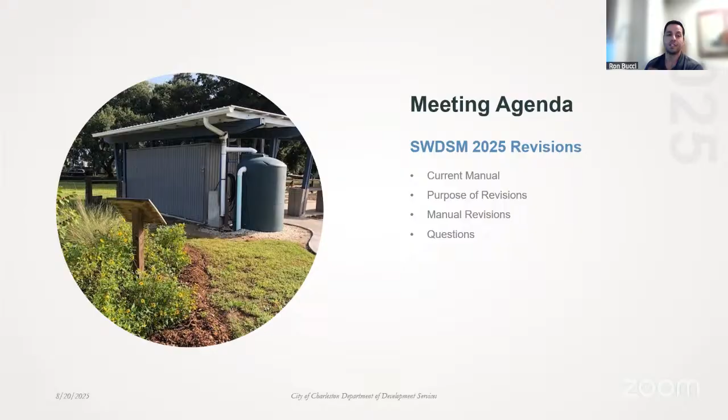Okay, great. So just a quick agenda: I'm going to go over where we sit with the current manual and then touch on the purpose of the revisions, why we are making revisions after 5 years of implementing the 2020 manual. Then I'll go over the details of the manual revisions with you all and open it up for any questions you may have.

So with the current manual, it was implemented in July 2020. It put a heavy emphasis on reductions in discharge rates and volumes, especially for those areas that we know flood within the city, of which there are several. It stressed the importance of accounting for potential sea level rise, making sure our city is more resilient to handle that. We have additional requirements specific to publicly dedicated systems that we would have to take over and maintain. An important aspect, in my opinion, is to prevent any adverse impacts to downstream and adjacent properties for any development or even city project.

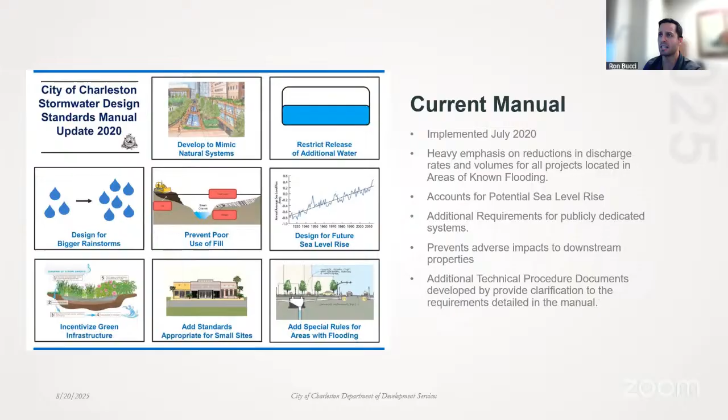And then we had a bunch of additional technical procedure documents developed to kind of clarify the more difficult aspects of the manual and add more information to that so the applicants can get a better understanding. So that's where we were in 2020 when we initiated these changes.

And now 5 years later, just like with any manual, you have to refine and take a good look at everything and make sure it's accomplishing the goal that we're trying to accomplish. So with that, the purpose of the revisions would be to reduce the complexity and the requirements like you all touched on, but maintain a very high standard to help reduce flooding in specific areas where it's needed.

Focus flood reduction requirements on larger parcels because those are the ones that will have a larger impact to the watershed as a whole. Attempt to remove the ambiguity that is present within the manual, which we'll touch on a little later. Create optional simplified approaches to address complex requirements. I'll do a deep dive of that, but giving people options is always helpful in my opinion.

Incorporate those technical procedure documents that we developed into the manual so that they're included in the manual and not just references elsewhere. And then create a plan to revise the manual on an annual basis, which is what Tim was getting at, seeing what works, seeing what doesn't work, communicating that with the development community and people at the city to make sure, again, are we accomplishing the goals that we are looking to accomplish?

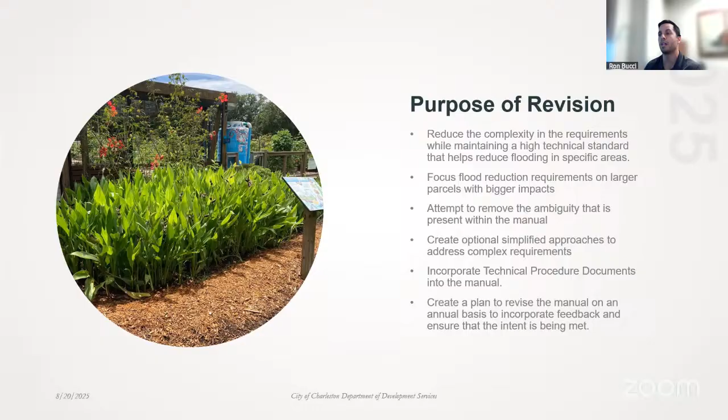So now I'm going to dive into some of the detailed revisions. These revisions go with the permitting process that we have. So one of the revisions we made is a construction activity application. Basically, you accompany that with your projects. We are only going to require that for land disturbance greater than 1/2 acre.

Previously, if you were within 1/2 mile of a coastal receiving water body, we would require that, but that sometimes had us looking at sites that were 0.1 acre of disturbance, very little benefit for us to have from a flooding standpoint. So we kind of took that out and didn't want to do that detailed review of something that's very small and non-impactful, I guess I would say.

The state does require land disturbance greater than 1 acre. So we are still more strict than what the state requires because of our unique situation and flooding that we have in the city. So we still want to make sure we're maintaining that strict standard. And even if you do not require a construction activity application, we still are checking that all state and federal permits are being obtained as applicable.

And this other one is just a revision to the expiration of city approval. We previously had this as 12 months. We moved that to 24 months. So if a project doesn't start construction within 24 months, you just have to reapply and get a new approval.

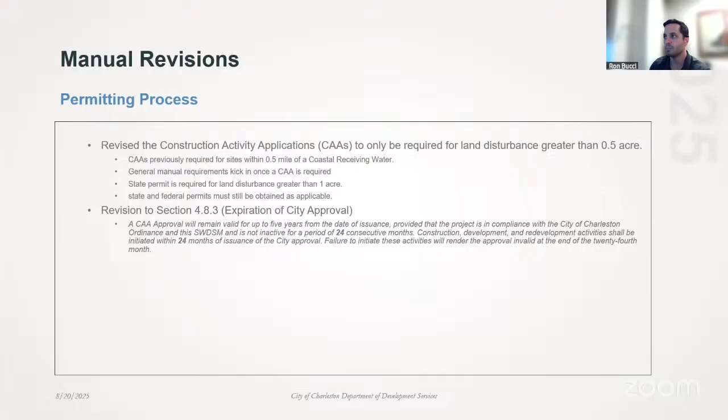So now we're getting into a little more of the meat of it. So this is the redevelopment requirements. So the current requirement reads that the requirements under this section, which requires reduction in flooding, must be met if the parcel has more than 20% of its land as impervious and improvements over the past 5 years exceed 50% of the total site value.

So this was kind of put in place for areas that would develop and spend a lot of money redeveloping their property and not having to do stormwater to create a benefit for the community. But what was happening inadvertently was a 0.1 acre site was being captured by this. So they were having to do very strict stormwater requirements. Again, we're not seeing that major benefit from them doing that.

So we revised this manual requirement to say all requirements of this section need to be met for the entire parcel in question, but it does not apply to parcel areas that are less than 1 acre or sites with a greater than 80% existing building footprint that is not being removed.

Our thought was if the building is taking up the entire parcel, you don't really have the room to do those stormwater improvements. And as long as we have other requirements to make sure you're not worsening flooding, we want to focus on those larger parcels to get that benefit that we really think our manual is aiming to get. No change in the requirements of this section.

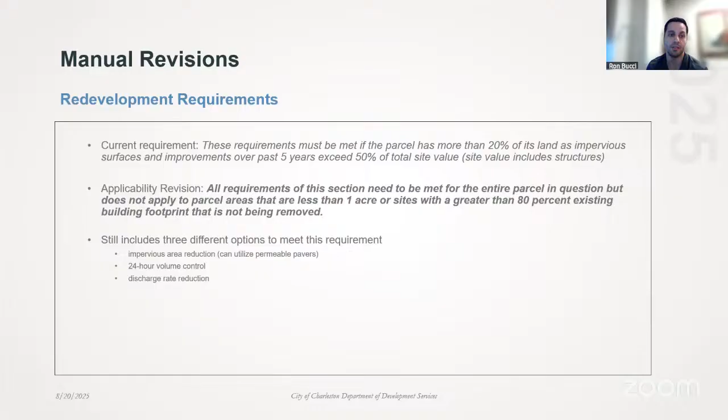And this is the last really deep dive into a more technical one. And then I'll kind of bullet list the other changes that I'm more than happy to go into detail with if you want. But the special protection area requirements. Previously, there were 2 separate SPA requirements. So to make it more clear and to remove the ambiguity, we just removed one of them and combined the 2 together because they work together anyway.

So with the revision, basically, the following design criteria shall be used for projects discharging to receiving waters within these special protection areas, but we don't want to capture the linear projects located on existing public infrastructure. So if you were just putting a sidewalk or a turn lane within an existing right-of-way, we are not going to require you to reduce the runoff of that work.

Simple fact is that has a benefit to the city, and it's us providing connectivity or traffic alleviation. We also don't want to put a burden where you then have to put right-of-way aside to reduce the runoff. We still want to make sure you're not making flooding worse, but we didn't think that was an appropriate place to have them reduce. And also the money you would have to put towards the stormwater to accomplish that, you could save the city money, which could then be used for future city stormwater improvements elsewhere.

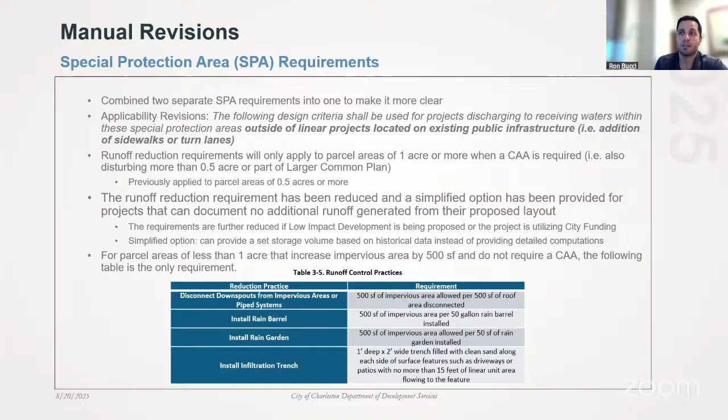Yeah, it's always tough to draw that line, right? We decided on an acre because we feel like that's the parcel that gives you enough room to actually fit a manageable stormwater system to meet the requirements. The difference between 1 acre or more or greater than an acre, you're just shifting the line slightly, I guess. I agree. So I think we just made the call that if you have 1 acre, you have enough room to do stormwater that will benefit the city.

Okay. I see Councilman Gregg has his hand up. Councilman? Thank you, Mr. Chairman. Could you go over, you mentioned we're maintaining a storage requirement, but no longer do you have to keep the peak flow below the pre-development condition? I may have confused you, sorry. No, you do. It used to be a 50% reduction in peak flow. Oh, okay. We changed that to a 20% reduction to match up with the 20% volume control.

From talking to the engineers and the design community, all of them said that what was driving their designs was volume control, and that's what was sizing all of their practices. But in our opinion, we still do want to look at discharge rate, right? And make sure that you are bettering that so you're not just getting the water out as quickly as possible. So it's still in there, but we did reduce it.

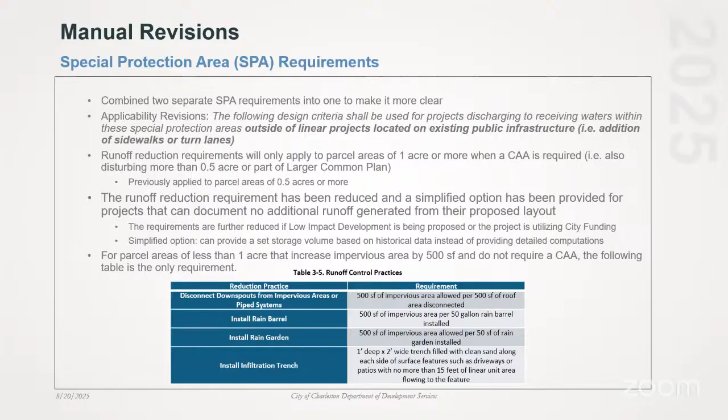So if volume is controlling, then what's the point in looking at rate? I would say volume's controlling in almost every scenario, but there are unique situations based on your tailwater conditions where it could be rate controlled. So I just didn't want to completely eliminate that. Gotcha. Okay. I may have another question for you tomorrow, but that's okay. Thank you. Of course. All right, Mr. Bucci, you still up?

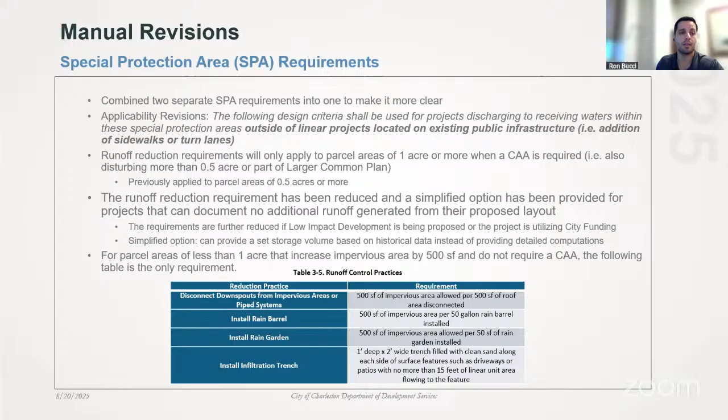Yes. So those are the big changes that I thought worth diving into in more detail. And then I have a list of other technical revisions, all from feedback that we received from the design community. Water quality requirements: we really just provided additional information on acceptable computation methodologies. We had one written out. We wrote out another acceptable option for them to use to meet that.

Storage recovery: we revised the language to allow stormwater systems to drain within an acceptable tolerance. We basically were saying you need to drain the entire system within 72 hours to 0.00. So we said, hey, if you're within 0.1 feet, that's good enough for us. We think that's appropriate, that a second back-to-back storm will not be an issue, which we do have them check.

Self-cleaning velocities. We've been seeing a lot of computations for this. This is for public systems. We say you have to show 2 feet per second velocity so that the pipes can self-clean. But if you can provide a 0.5% pipe slope, then you inherently meet that requirement, based on the computations we've been seeing. So just provide that slope on your pipe and you don't have to provide computations to support the self-cleaning velocity.

The 1% storm analysis: similar to the SPA, we provided a conservative approach to address the fill displacement, which is if you're filling in a flooded area, you have to offset that.

So we provided conservative assumptions they can make to meet that requirement. Culvert analysis, just more information on how they can model the culverts. Peak water surface elevation reporting. We basically did a similar thing to the storage recovery where we allow a water surface elevation increase within an acceptable tolerance. Basically, we were measuring to the 100th place, and we are still measuring to the 100th place, but just a little bit of breathing room to allow for them to meet that requirement.

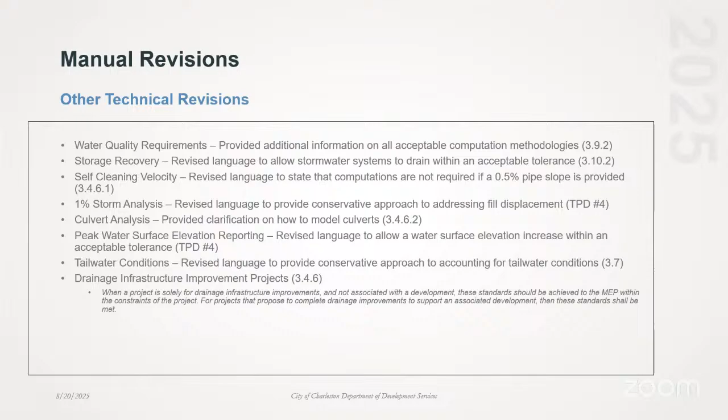All right. Any other questions of committee members? Mr. Bucci, you still want to move forward? I'm done. All right. So, I tried to cover all the major changes. There's very minor language changes with the shift in the departments, but I think that really captures what we're going for, giving people options, upholding our strict requirements. If you guys have any more questions, let me know. And as Councilmember Gregg said, I'm more than happy to meet offline and get things in line for the next revisions and make sure we're meeting the goals of the city.

All right, great. Councilman Gregory. Yeah, mine has less to do with new development and more to do with existing old line neighborhoods that didn't flood at one point, but now they are. Will we do anything in this manual to address those issues in existing neighborhoods?

I know there's something with respect to new development and how it affects the old and existing neighborhoods. I'm really not talking about that. I'm talking about, hey, things are just changing. The water seems to be reclaiming certain places where we have done filling where we shouldn't have. And now we're sort of paying the price for all that. What are we going to do about it?

I think from the manual standpoint, a lot of these are only applied when there is new development. But I think on the initial go around in 2020, there was a good effort to account for the sea level rise and the increased rainfall. So obviously we account for 2 feet in sea level rise in all of our designs. And then the rainfall we pull from NOAA data, and our plan is, if NOAA Atlas updates their rainfall data, the manual also can update its rainfall data, which we do every year.

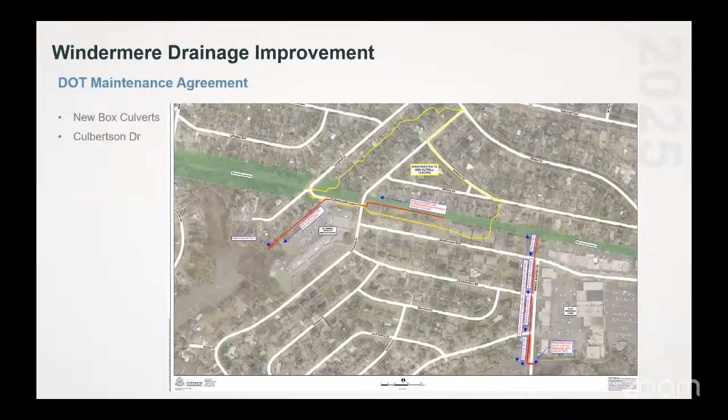So we did Windermere, we're on to Church Creek. Church Creek project updates, Mr. Chairman. Mowler and Wolk Drive, those were our retrofit projects where we acquired and demolished six flood-prone homes with FEMA funding, then used a National Fish and Wildlife Foundation grant to design and permit stormwater storage and construct stormwater storage and conveyance improvements.

You can see on the top right what the area looked like during some of the flooding in 2015, 2016, 2017, 2018. Bottom right is pictures of the completed site. We've had some really good reports from residents in this area that they have not had any structural flooding since those projects went in. We certainly haven't equaled the 2015 storm since that time, but have had some storms pretty close to the 2016, 2017, 2018 storms. So certainly an improvement to flooding in the area.

Still have flooding in the roads. It's only a partial improvement, but it drains much faster and doesn't get into the homes.

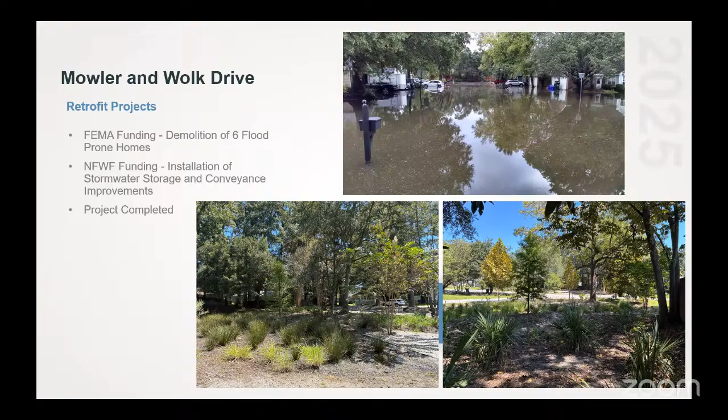Bridge Pointe, this was the larger site. We acquired and demolished 32 flood-prone townhomes, again with FEMA funding. This is about a 5-acre property. Using National Fish and Wildlife Foundation funding, we designed and installed stormwater storage conveyance improvements. We call this an ecological park.

We've presented the site a number of times. You can see the top picture what this area looked like - Bridge Pointe, the townhomes being on the left, flooding extending out into adjoining properties around the townhome community as well. Bottom right is a picture of the completed ecological park. It builds back a wetland ecosystem that's interconnected with stormwater ponds to help store and then slowly drain out water in this area. It also will serve, and does serve currently, as a passive park space.

But we do have a next step that we're working on with the Parks Department. We have built the civil infrastructure and they are coming back to install playground equipment on top of the pads, some bathroom facilities, a water fountain, and walking trail improvements. That work is expected to complete sometime in the middle of next year.

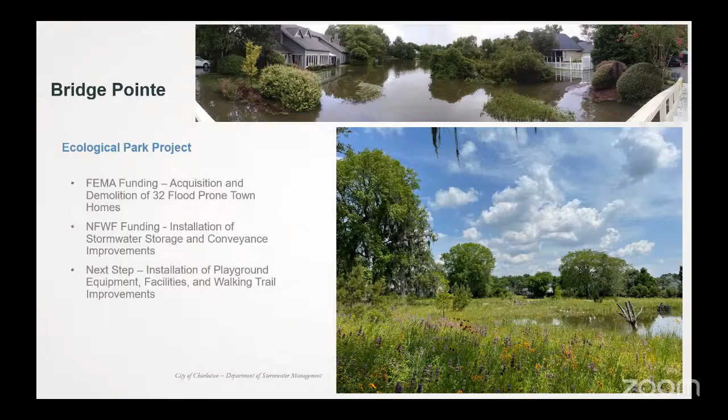So this was a National Fish and Wildlife Foundation design, again, of improvements here. We've worked through purchase and sale agreements with some property owners in the area to acquire both fee simple property and easement across wetland complexes. Those purchase and sale agreements are complete. We're working through closing with those owners.

Design is primarily complete and we're into permitting on the design to restore some of the drainage connections from that canal into these adjacent wetlands, remove debris accumulated in the wetlands over the years, do some wetland ecological enhancements, as well as some berming around structures to allow the wetlands and storage properties to flood deeper without harm to the buildings. That work is funded through permitting, but we still need to come back and do the construction work, which will be funded out of the TIF. We expect to get into construction likely sometime in 2026, depending on final permitting efforts.

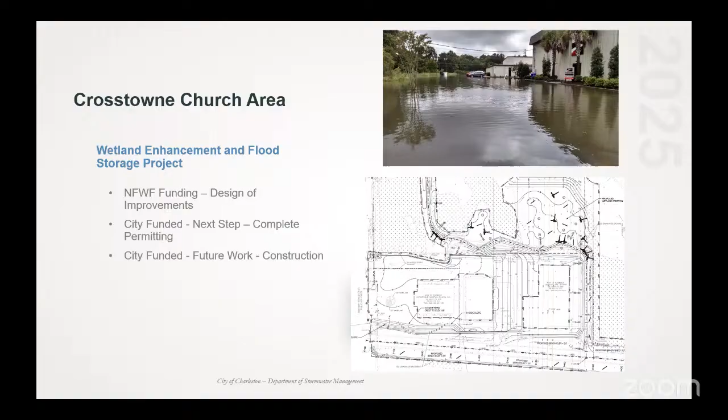Lastly, Mr. Chairman, you asked for an update on the TIF. Ms. Wharton, our CFO, put together the updated bonding capacity based on development to date in the area and the increments in the area, and estimates a bonding capacity of just over $11 million. That will work towards the Cross Towne area construction, but also has available capacity for additional stormwater projects. Once we move crosstown out of design and permitting and into construction, we would typically shift on the capital improvement plan to bring a new project into preliminary engineering so that we continue that project pipeline, with something always in design and permitting and something always in construction. With that, happy to take any questions.

Any results came out of that as far as action steps to be taken in the future? Some of these flood storage projects with Crosstowne Church especially, but Bridgepoint to some extent, are somewhat envisioned within that study. We did have a few other project concepts: a Hickory Farms diversion channel, a section of work over at Lake Dodder, and a section of work in the West Ashley Circle itself, as well as some tide protection under the CSX Railroad. All of those were taken into preliminary engineering, and unfortunately, none of them showed significant benefit for flood conditions in the basin.

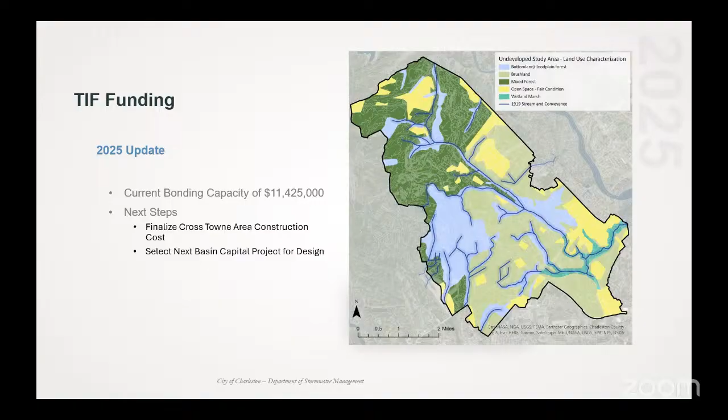All right, J2, Forest Acres Phase 2, change order. Yeah, thank you, Mr. Chairman. I'm going to try to go backwards in my presentation without making everyone sick.

So this is a change order for the Forest Acres project. You'll probably remember one of the very first change orders of the project was a cost reduction of $796,000, where we worked with the contractor to remove some of the more aggressive slope stabilization methodologies, came up with a couple of different approaches looking to do cost reduction on the construction project while still keeping the slope stable and high quality. This change order is to add back in just over $128,000 for one area where the slope has not been able to be stabilized with those revised methods. So we are going to have to add some riprap basically to support that toe, still ending up with a net savings of $667,000. It was a really good collaboration between Gulfstream the contractor, Thomas Hutton the engineering firm, and the city project managers in coming up with some different approaches.

But whenever you do an aggressive cost reduction, you always have the chance of some increase, and we knew that going in. So that's what this final change order is. Other than this, this is the last of the punch list items. As you've mentioned, we've had this completed for quite some time. After this, all we'll have is potentially a zero-out change order, assuming this all stabilizes properly.

Listen, the net change orders are positive. I'm used to net change orders being in the other direction. So, thank you for all your help on that.

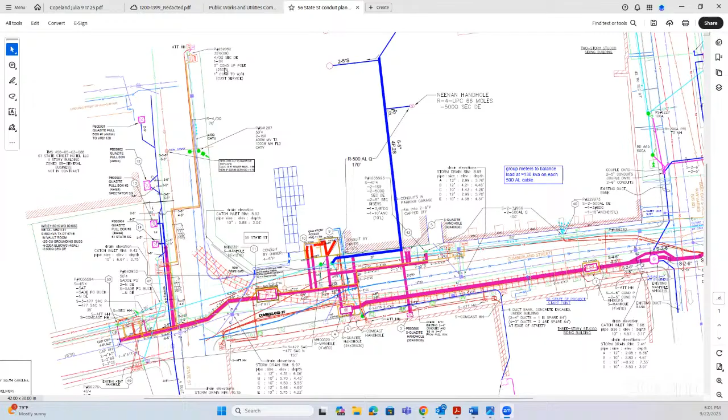And then we would reimburse them out of the non-standard service agreement funds. So if we add them to the list, Dominion would pay 50%, and the city would draw from the city's account 50%, and they would reimburse us with the cash to cover the city's share. So it wouldn't be anything—it would be a temporary bridge, I guess, for us.

As it relates to the non-standard service agreement, this is primarily focused on prioritizing neighborhoods. But it's proving to be, I don't think I have to tell you all, very difficult to get all needed signatures and all transformer locations in neighborhoods. So we remain, and I want to be very clear about this, very committed to prioritizing neighborhoods on this.

But if we can, while we're waiting on neighborhoods that are on the list and priority, waiting on those signatures, if we can bridge another project to get power lines buried, I think it's a smart use of public funds that are kind of just sitting there waiting to be tapped.

And I don't have to tell you all either how expensive these undergroundings are—the cost of them just continues to go up. So this would, again, be a short-term bridge of the funds, while the developer would ultimately end up paying for it, our share of it.

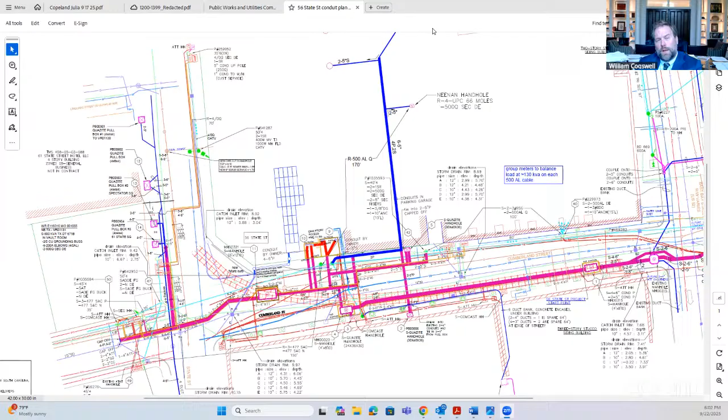And then the other component weighing into this conversation is we are in the middle of discussions with Dominion about expanding the non-standard service agreement, allowing for additional projects and additional money from Dominion for this. So all in all, I think this is a very positive step forward.

None of it's finalized, of course. We need to bring it back through this committee as we work through those details. But I've got to say, hats off to Dominion for working with us, and I think we're going in a good direction. So, Julia, anything you want to add to that? I think you did a great job.

Councilman Seekings has his hand up, Mr. Chairman. Okay, good, I didn't see it. Thank you, Mr. Mayor, and thank you, Chairman Waring.

So what is the ask specifically on this particular item? Right now, I believe it is that we would allow them to submit an application for the non-standard service agreement, because normally the list right now is full. And it's capped at four, right? It's capped.